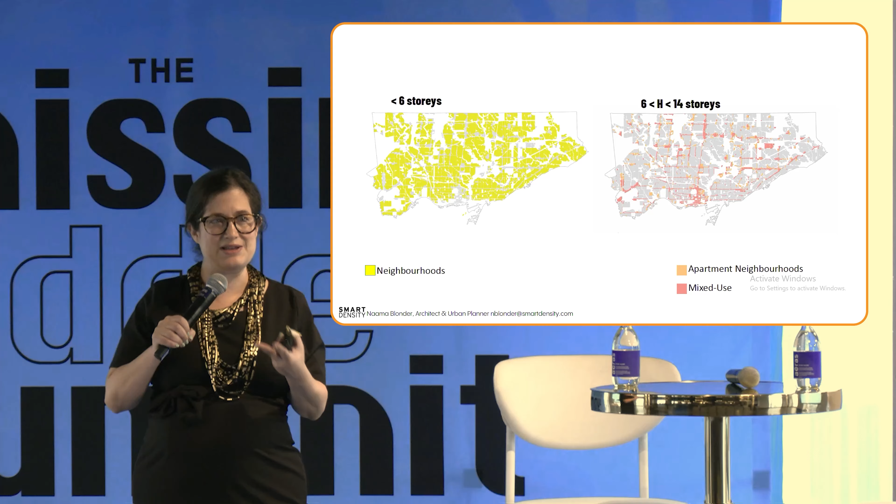To keep the scope of my presentation clear: if this is the land use map of the city of Toronto, there are two things. What Chris covered and the missing middle started with was the yellow belt. I extracted three land uses from the map: neighborhoods, apartment neighborhoods, and mixed use.

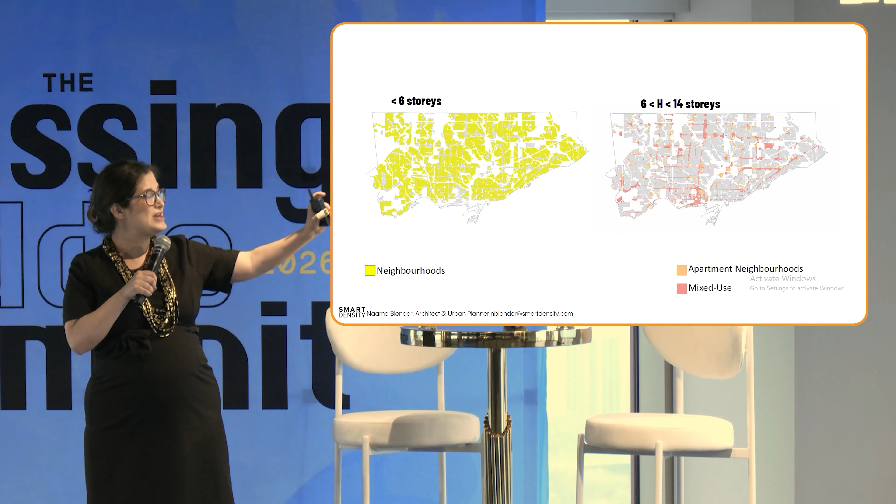So if I'm now talking about Midrise, 6 to 14 stories, I don't want you to leave the summit today thinking, wow, they increased it to 14 stories, that's amazing. Because that's not the case in the yellow belt, it's only the case under mixed use and apartment neighborhoods.

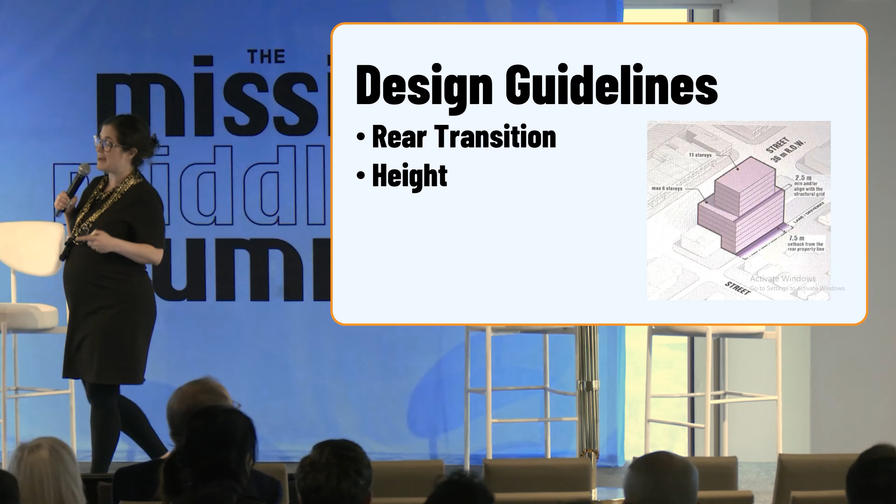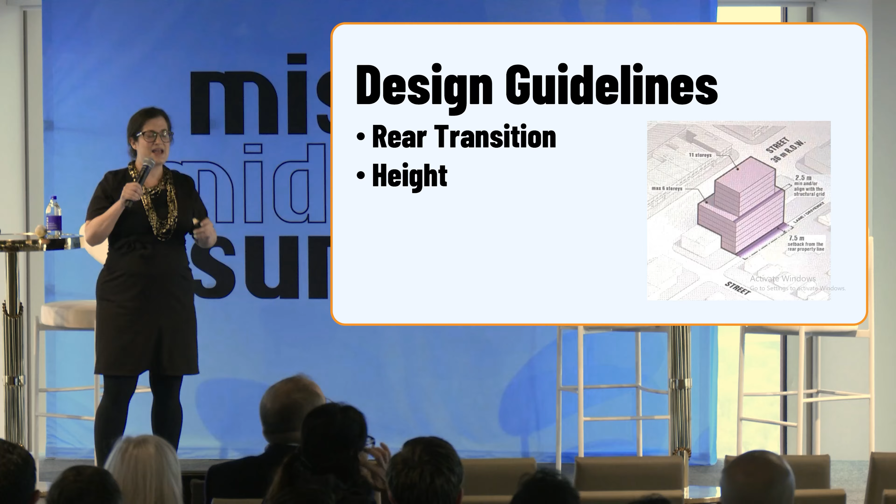So what has changed? Three things: policy, zoning, and design guidelines. Specifically, design guidelines changed first, then the zoning, then the policy. Under the design guidelines, we talked a lot about the wedding cake effect. Two major things changed: the rear transition and the height allowance. So no more angular plane dictating this wedding cake effect. There are two, maybe three changes, I don't want to get into the nuance, but essentially they simplified the built form, and the height as well.

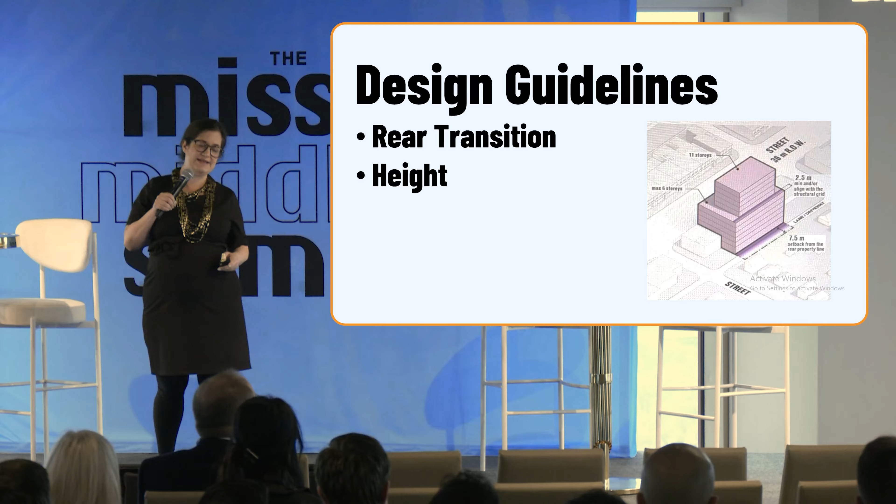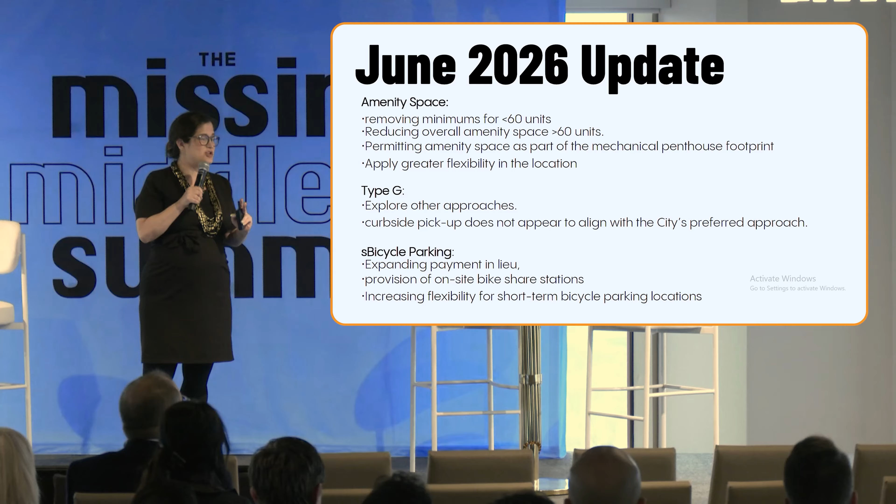In June, next month, we're going to have an update. I haven't yet seen the actual document, but when I reviewed the agenda, there are some additional changes coming on amenity space, Type G, and bicycle parking.

The other thing that happened, that was the guidelines, right? But then we also saw changes to the zoning and the policy. Specifically for the zoning, what the city has allowed is for FSI and height to change to be as of right.

This is probably the biggest move. When the original Midrise building design guidelines came out, I believe in 2013, it was before my time in Canada, so I don't remember exactly. Around 2010 to 2013, there was a discussion of making it as of right. I believe the chief planner, Jennifer Keesmaat, back then was the one proposing to make Midrise buildings as of right on the avenues. My private explanation is that the city probably didn't want to give up Section 37 money, because once you have an uptake on the zoning and density, you pay. Back then, it was a big part of the negotiation of how much you pay the city for that density, but it was brought up and cancelled, and for 10 or 15 years, no one discussed it.

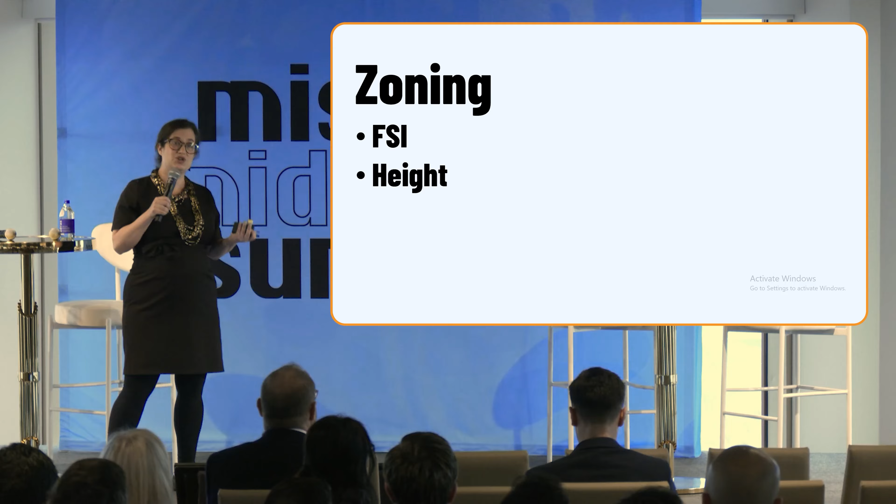Now, they changed the FSI and the height, so that's going to allow those Midrise buildings to not require a full rezoning, a full ZBA, zoning bylaw amendment.

And the policy, okay, so we're moving up in the hierarchy. There was an attempt to redesignate more avenues from the yellow to mixed use and apartment neighborhoods. That step was supposed to be citywide. It started, I believe, only in Ward 9 and 11, but it should have been citywide. But think about it: now we have it as of right, the FSI, the density, the height, and more streets are moving from the yellow to the pink and orange.

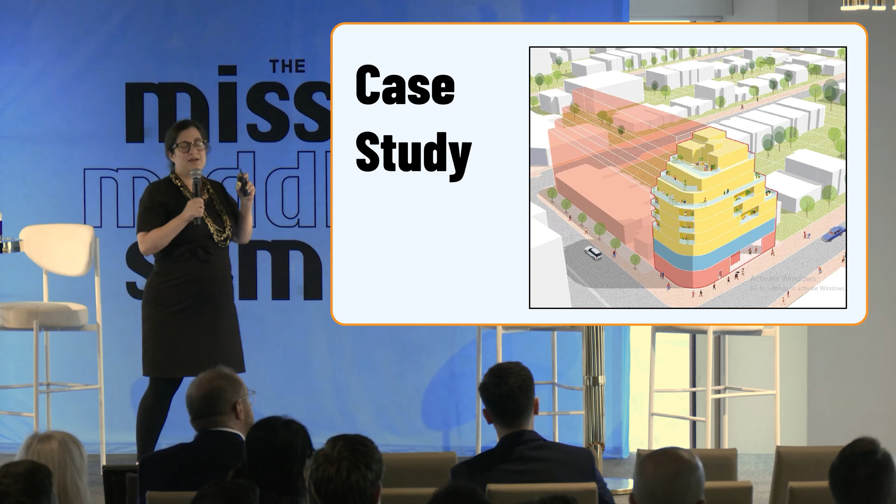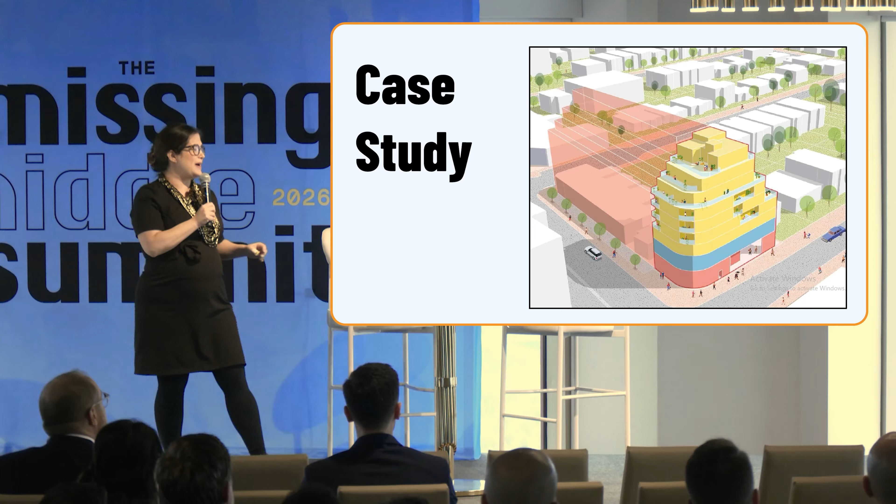I want to very briefly speak to one case study and share with you what we did here. This is a site we had on Bathurst, 2989 Bathurst Street. Once the council approved the increase in the FSI and the height, on the other side of the city, Canadian Tire appealed the zoning because they wanted more density. This is at Bathurst and Lawrence.

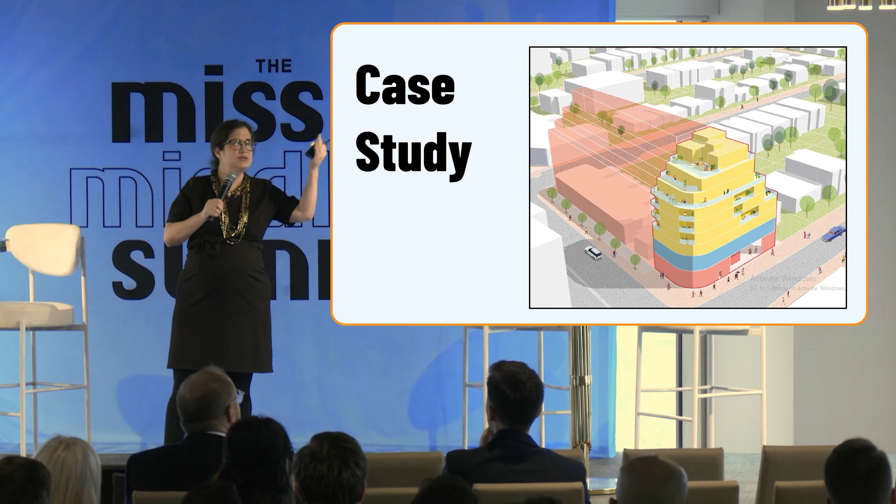We had one appeal, and I thought, that's great, council already approved it. I can go to C of A and ask them to just honor council approval. Canadian Tire in Scarborough should not interfere with something that was already approved. I woke up that morning thinking this is going to be the easiest C of A hearing of my life.

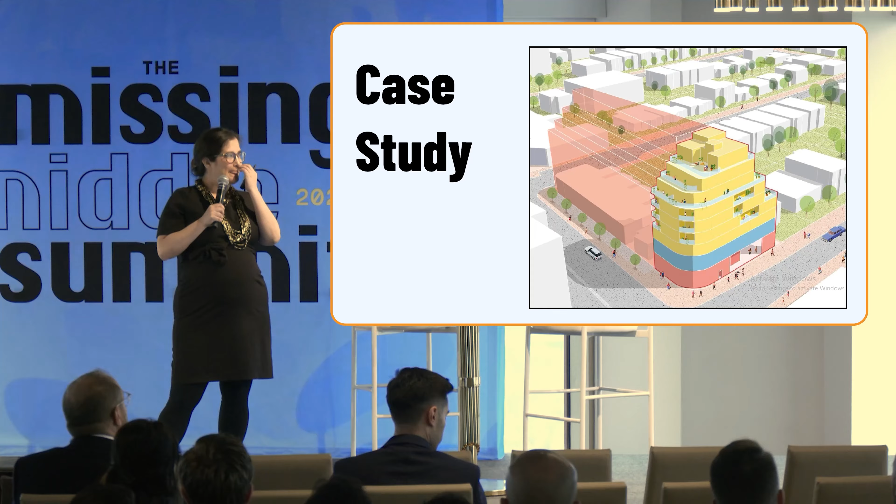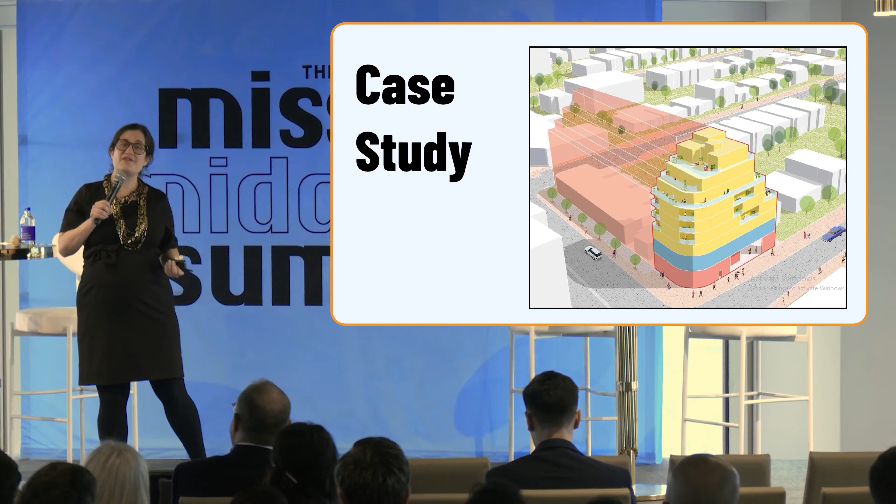And the committee declined our request. That speaks to a challenge, that getting things approved or massaged or remodified through C of A is great, but it's still through C of A. There's a lot of uncertainty.

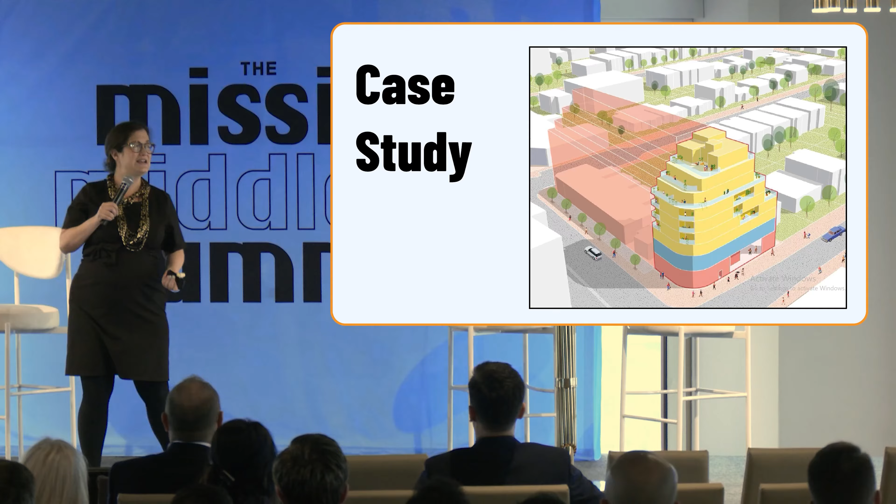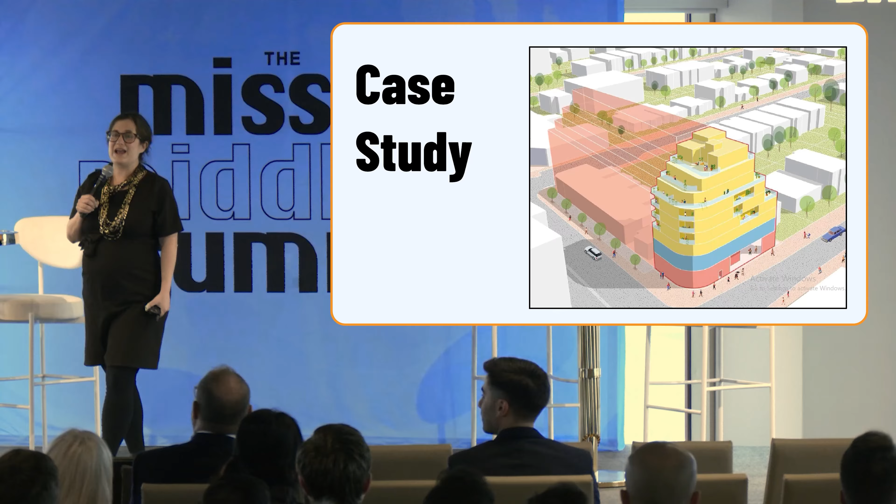I felt that they were, what's the opposite of empowered? Unempowered, to make a decision, when their mandate is to follow council decision or council direction. I thought that would be the easiest hearing of my life, and they declined, and I had to wait for the appeal to be over, property specific. But at the end of the day, there's a risk with C of A.

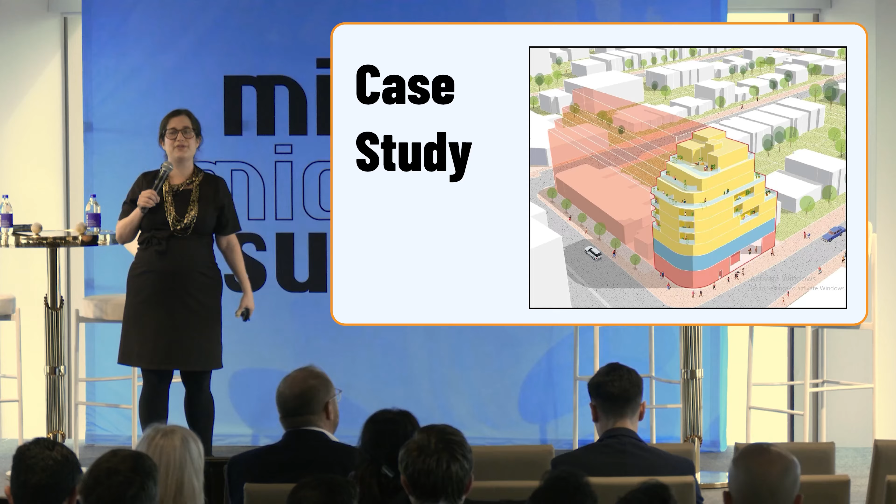The neighbors were there saying how we didn't include them in the process, and how this doesn't follow the Midrise building guidelines, accusing us of being untruthful, although this follows the guidelines very accurately. Yeah, that was the experience.

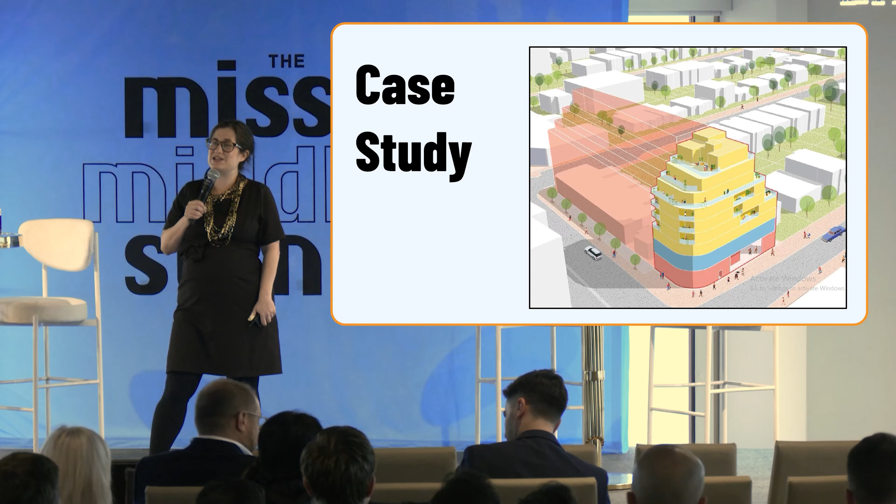I just wanted to show you, I don't know if you can see it, but I can spell it out. Once you go to C of A, I still go, even when I have a project that is truly as-of-right, because most of the time parking is still a trigger that sends you to C of A.

So once you go to C of A, I'm going to ask for more things. Sorry, I'm realizing that I have people from the city here. I'm being recorded.

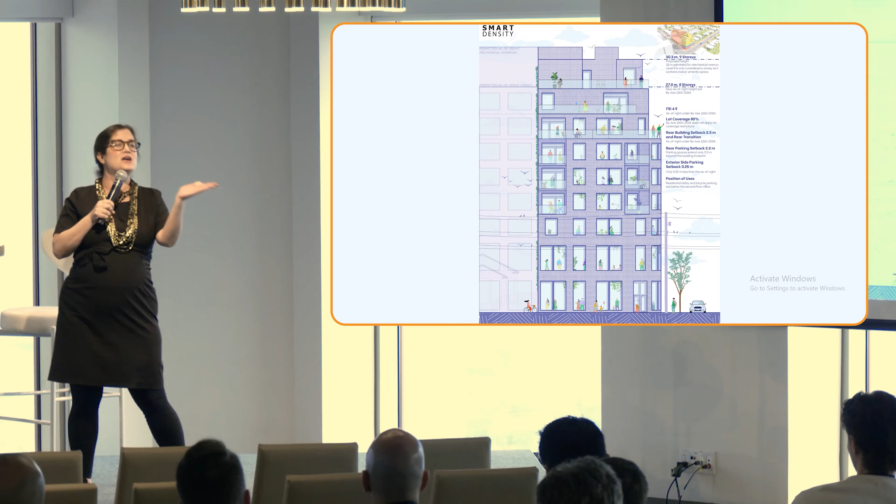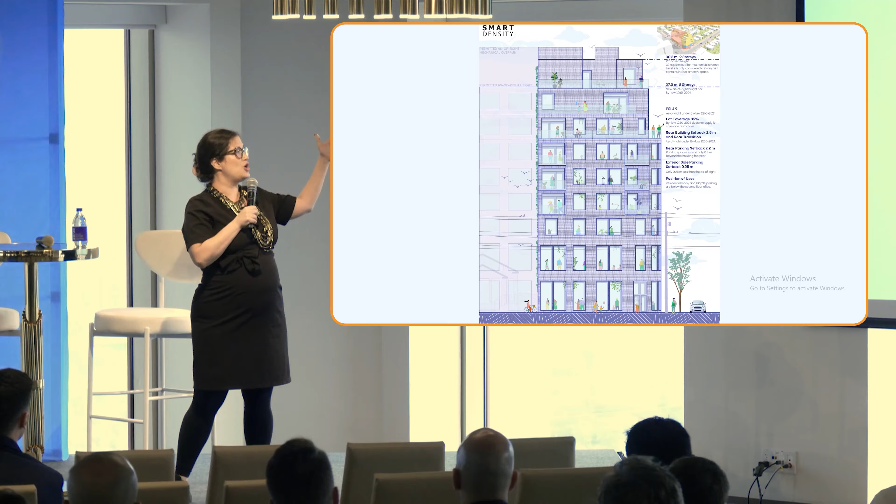One of the things now is putting the amenity space on the mechanical rooftop, which frees up space in the building itself for more residential units. Putting it on the mechanical rooftop doesn't trigger it as a story. So technically this height of the building was allowed by the FSI, but I got another additional level, the additional story, because putting that amenity space on the mechanical rooftop doesn't trigger it as an additional story.

If you've noticed my summary of what's coming up in June to the Planning and Housing Committee, you'll see that the city acknowledges that and is about to change it. I think that's a good change, because I calculated how many units, about 3 or 4 residential units, we were able to get with that amenity space.

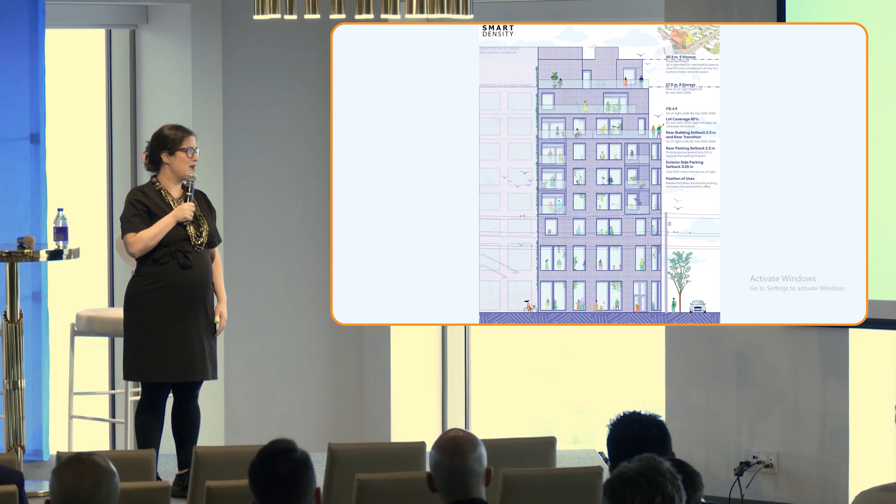And then we really massaged the setbacks a little bit to make the parking more efficient, so I could squeeze in more parking. But these are very light variances for those of you who go to the committee often. So that is a very welcome change.

As I said, that entire presentation would have been a dream 5 years ago. And I will finish with an anecdote of what I think of this. First of all, this entire presentation is almost like credit and kudos to the city.

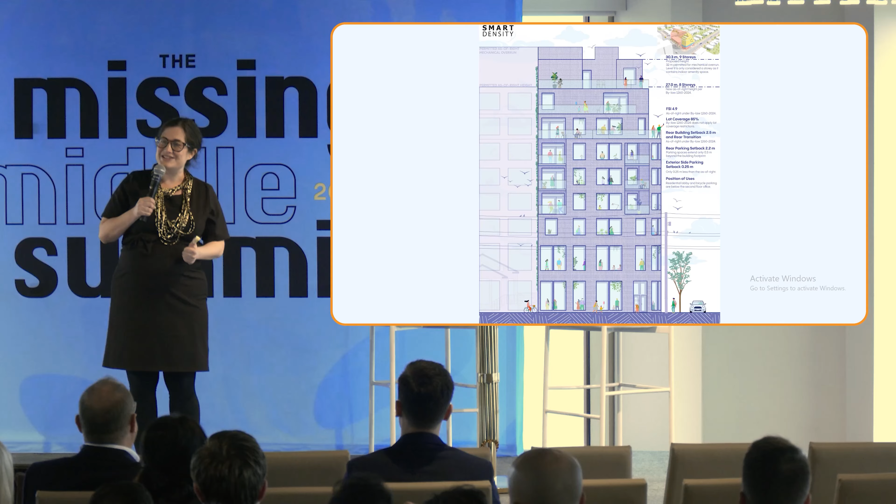When we were telling our kids that we're expecting a baby, my firstborn said, 'I want a big brother.' And I said, 'Sweetie, we're simply too late for that.' And I wonder if all of these things, if we're not 20 years too late for that. But anyway, thank you very much for listening to me today.